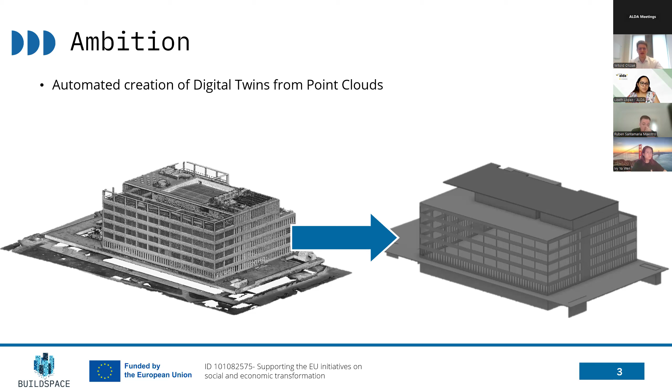Another ambition of ours: as a construction company, our main field of work is managing, monitoring and steering the construction process. So naturally, we also look for chances to automate the monitoring of the construction process. And here, especially, we focused on utilizing regular drone flights for monitoring deviations. So we wanted to collect the data about the deviations with drones and then have it parameterized and saved for viewing in a BIM model.

Once we are finalizing our construction process and handing over the buildings to the investor, it's often that we are asked to do a thermal assessment of the facade to show that everything has been executed according to the design plans. At times you might also need to do an analysis of thermal bridges and thermal anomalies before you even start the construction site. So within Buildspace, we also looked to create reports automatically after conducting a drone inspection.

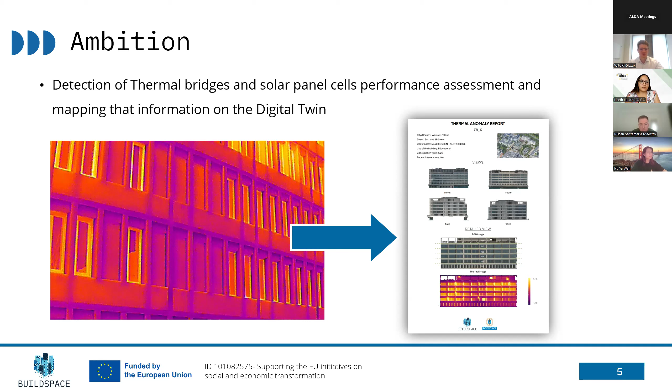In our research and efforts, we also often look for an opportunity to interact with mixed reality interfaces. So within Buildspace, we also wanted to have a chance to browse some of the data collected in the mixed reality interface. As you may have already realized by the images in previous slides, we managed to, in some shape or form, execute all of those ambitions and realize them within our Buildspace services.

For data collection and testing of those services, we used two pilot sites. Not all of you have to be familiar with the geography of Poland. Here you have a simplified map of Poland with Warsaw, the capital, marked, and Poznań, another big city in Poland. We used two of our construction sites: the Rectorate building for Poznań University of Technology, and we are also building a new faculty of psychology for the University of Warsaw. Here I'll quickly go through some more information about those sites.

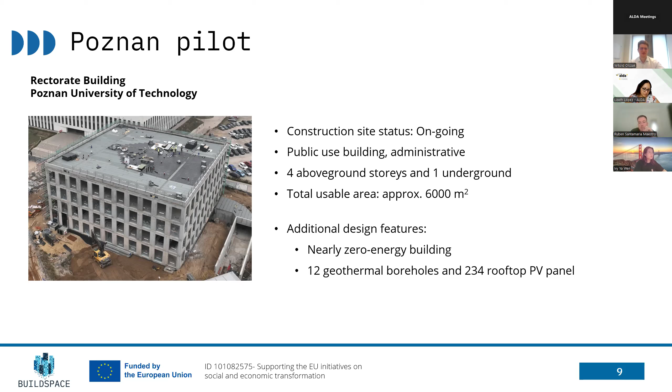Some features worth mentioning are that this building is designed as a nearly zero energy building, and it also has a geothermal installation as well as photovoltaic panels on the rooftop.

The Warsaw pilot is right now undergoing the final handovers. This construction site started way earlier than the Poznań one. That's why we couldn't use it for all of our use cases within the Buildspace project.

And again, we're building this faculty for University of Warsaw. This one won't be strictly an administrative, but an educational building. So the students will hopefully soon be visiting this faculty every day. And this building is of much bigger scale. It has

approximately 21,000 square meters of usable floor area, and it also has a strong focus on sustainability, achieving BREEAM certification. It also has photovoltaic panels on the rooftop, but you aren't as interested in the building and its characteristics, but more about the use cases that we used those construction sites for within Buildspace.

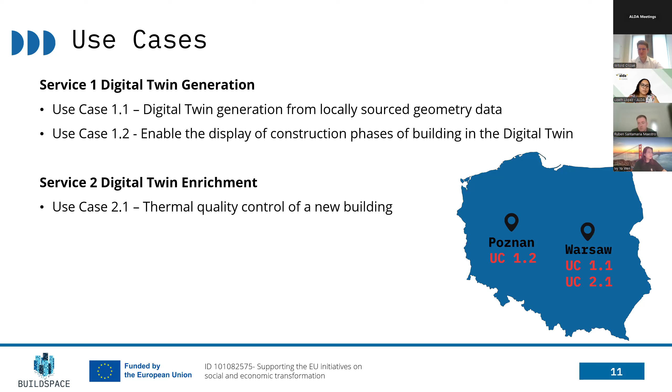In the Poznań pilot, we dove into the delay detection use case. Let me now switch presentations and we'll go through the key concepts of Buildspace. So I'll stop sharing for a second.

And please let me know if you can now see the beginning of the next. Yes, we can. Perfect. Thank you, Lisa. All right. So here, no worries. It won't be just me speaking in a second.

So in the key concepts, it will be me and then Ruben going through the main technologies that we used for our two Polish pilots, and then Ruben together with Ja will dive into the services, and then we'll go to the demo session.

So the key concepts. And before that, I just also wanted for context to mention that we had service 1 and 2 implemented at our two construction sites, but Buildspace goes more broadly in its innovations, and there are also within our project other pilot sites that had city-level innovations. Today we will focus only on the building level ones.

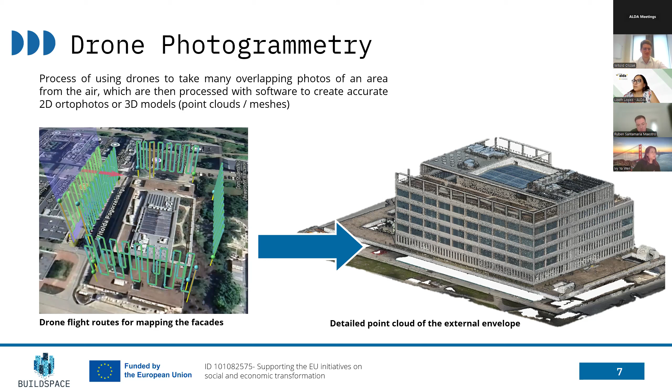Laser scanning. So at the Warsaw site, we scanned the complete building, and for this we used a Leica scanner. This takes much longer than a typical drone flight, but thanks to simultaneous localization and mapping, you not only can immediately view the scanned area, but the stations from which you move the scanner are visible and mapped in the point cloud. So you can, during the process of scanning, control and monitor what you are scanning and what information you managed to already capture.

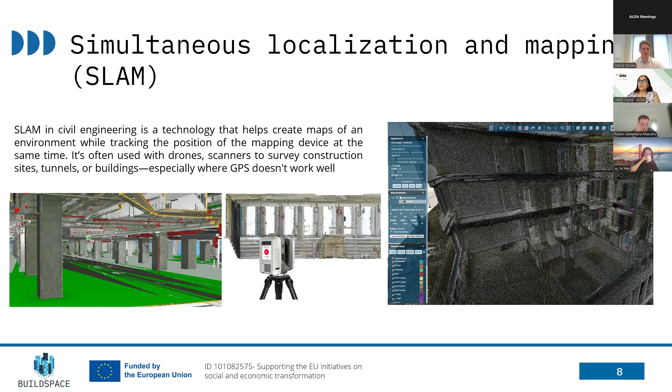And now to mention the scope of exact data collection at our sites. So in Poznań, here again the use case to detect delays, we did 11 drone flights that were spread out. So we did them in 2 or 3 weeks intervals on average.

And we did that to then from each point cloud have particular stages of the construction to monitor the construction process. So here the drone flights had to be perfectly matched to the construction process to not miss any data.

And in Warsaw Pilot, we had 4 total drone flights. I will immediately say that it wasn't necessary to have exactly 4 of those, but maybe to keep some suspense, I'll later in today's event explain why we had to do 3 total thermal missions. And as I mentioned, we also did an internal scan of the complete building.

This was a major effort spread through, I believe, 2 months of work, and we created almost 1,800 individual scans, which were then connected and processed, and this way we produced almost 300 gigabytes of point cloud data.

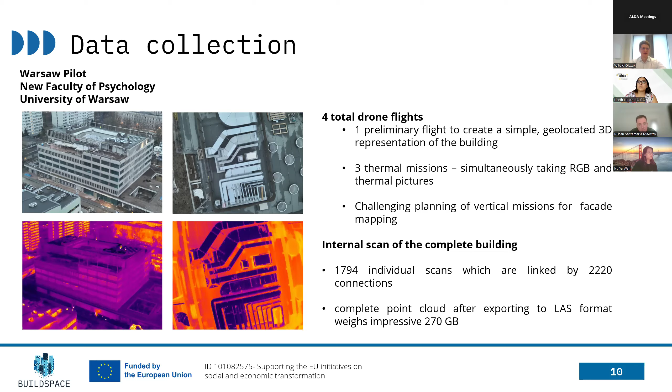Now I'll give floor to Ruben to go on with the key concepts related to building inspection. Thanks, Wito. So basically, I will be diving through the key concepts from the Service 2 side, which has been tested on the Warsaw pilot. So starting with the concept of the thermal envelope. Well, this will be a concept that we'll be referring to frequently throughout all these sessions.

And the thermal envelope includes all the elements that separate the interior environment of the building from the outside, let's say walls, windows, floors, and so on. So its main function is to regulate heat flow, helping to keep the building warm in winter and cool in summer. So in that sense, a well-designed envelope is essential for energy efficiency and, of course, indoor comfort of the inhabitants. Then, if you can move, Wito.

Moving on to thermal anomalies, these are areas of the envelope that behave differently in terms of heat transfer of the building. So a common example would be a thermal bridge, which is a place where heat escapes more easily than it should. And this typically happens at corners, structural junctions, or weak insulation points. Could you please come back just for a second? Okay, in that sense, these issues not only reduce comfort, but also they increase energy loss in both summer and winter.

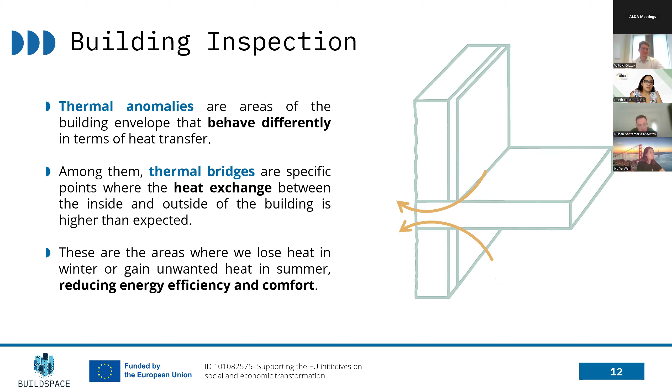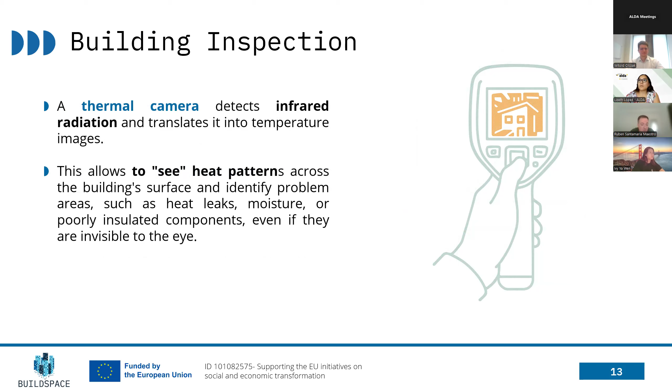To detect these anomalies, we use thermal cameras, which are devices that convert infrared radiation into temperature images, which allow us to visualize heat patterns on a building surface. That way, we can identify issues like heat leaks, moisture, or poor insulation, even if they are invisible to the naked eye, which is most likely the case.

Traditionally, this inspection is done with handheld cameras, requiring a technician to walk around the building and manually capture images, which has several limitations, ranging from lacking access to harder to reach areas to relying heavily on the operator's experience. So on top of that, the images are not integrated into any 3D model, making the process slow and subjective.

So while drones improve access and coverage, they still don't solve the core problem, which is that images are still isolated. So they are not geometrically aligned, and the facade analysis often still relies on handheld inspection. So we are still lacking a truly integrated view of the building's envelope.

To solve this, the RGB images are processed using photogrammetry techniques, as Wito was saying, mostly relying on structure from motion and multi-view stereo techniques to generate a dense 3D point cloud. And then, thanks to the algorithms developed within the Buildspace project, we are able to include thermal data from these thermal images into each point of the cloud.

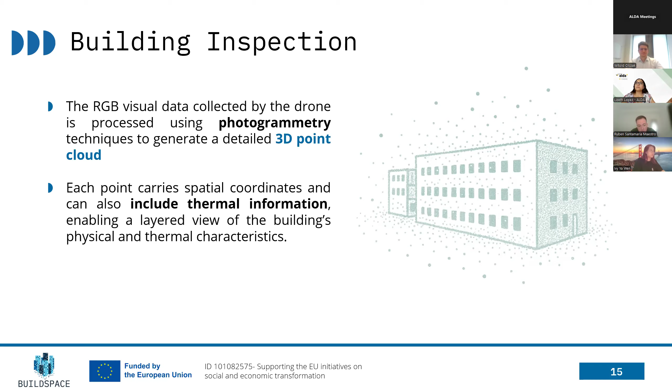So the point will not only contain geometric data, but it will also contain thermal insights of the building's envelope, resulting in a layered and detailed digital model of the building's characteristics, both visually and thermally. So I think that covers the key concepts we will be needing. And now I'm letting you, I think, yeah, you got the one.

Thank you, Ruben. Thank you, Wito. Welcome. I'm now sharing my screen.

Can you see the screen? Yes, we can. Okay.

I'm Yao. I'm very happy to be here and to share from the service provider side. I will introduce service one, which has two pilots. And in service two, Ruben will introduce later.

In each service, we have three points of introduction: first is objectives, input data and processing, and the methodology, and the platform functionalities. Then I will talk about the service one and service two synergies.

Here's an overview of what we are doing. From the data capture part, we have the drone and laser scanner. Vito and Ruben have introduced much on this, and the processing. We mainly process the 3D point cloud model, and then we have the results for service one: the IFC generation part, and also the construction progress monitoring part. Here is the Warsaw pilot, and here is the Poznan pilot.

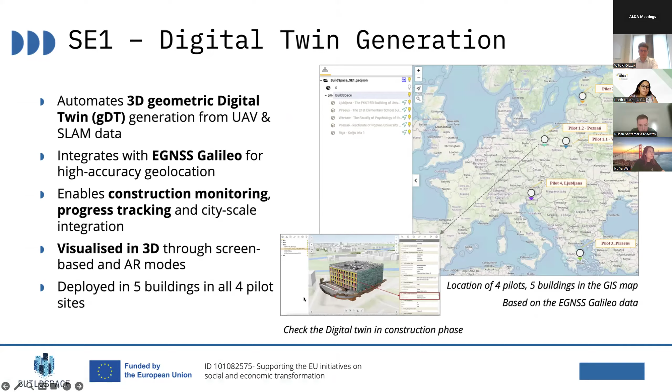So I will go for the first part, the digital twin generation part. From the objectives, we are going to do geometric information, which is the geometric digital twin. The key part will be extracting the key geometric information from the unstructured point cloud.

So our input data will be the 3D point cloud data, E57 or LAS format. In the processing part, we segment our point cloud data into wall, windows, door openings, and roof. We extract the boundary of this for users to measure and also see what semantic information is linked with the digital twin, and to retrieve the spatial relationship information among different elements.

So here is the input and processing, here are the two pilots. For these pilots, as I said, we have the data. We need to do the data generation, data clean segmentation, geometric extraction, and IFC generation.

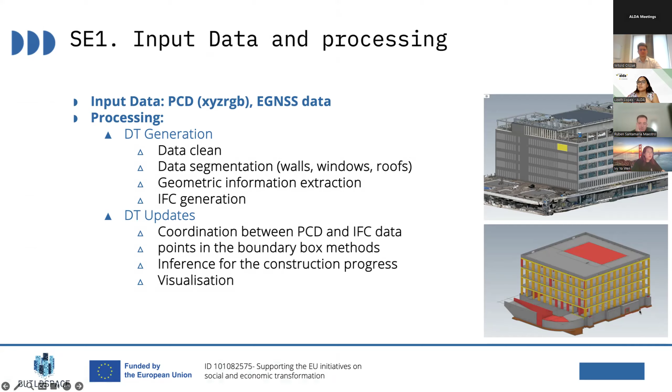Digging into the first generation part, here we have the detailed methodology. The first step we are doing is we need to clean the data, because the model we have has many noise, but we only want the primary building elements like walls, roofs, and openings.

After we get the cleaned point cloud data, we use a machine learning algorithm. Here we use PointNet++, and we also tried another algorithm that did not work that well. PointNet++ works okay for this case. Plus some manual adjustment, we have the segmented point cloud data, separated into categories: roof, wall, and window.

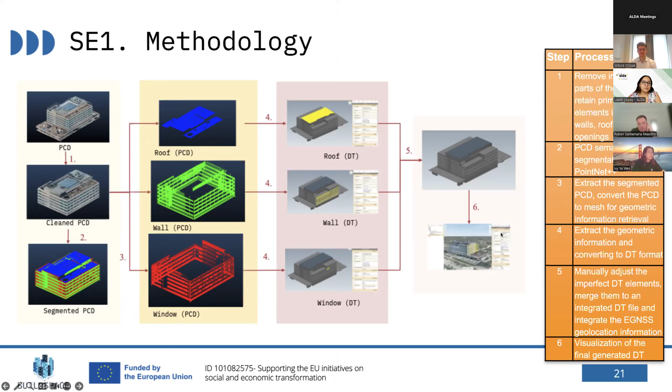We have several functionalities, and in the later demo phase I will show these functions as well. Here you can see the segmented building elements, and I mark up the different categories of points into different colors. We can use the section box to see what's inside the building, do measurements, and visualize element properties when you click on the IFC elements. We can also set the transparency of different elements, whether it's the IFC model or the point cloud model.

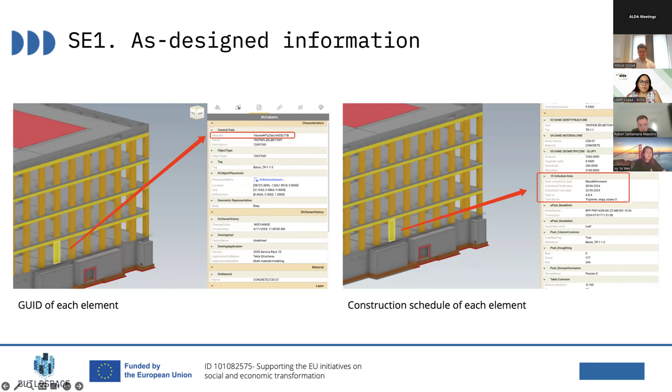Let's move on to the second pilot, at Poznan University of Technology. Here we have this building already introduced by Vito, and in this case we mainly detect structure elements. What we also have to prepare is the as-designed IFC model. Each element needs a proper GUID, the global ID, to trace the information of each element. For preparation, we also need the schedule data, which shows the schedule finish date and schedule start date, for us to retrieve the information. So our core methodology is to compare each scan with the as-designed model.

Then we update according to whether there are zero points, few points, or thousands of points in a box. So we can infer if an object is constructed or not, and then compare to the scan date, which is the date this point cloud data belongs to. We update the status, highlight the delayed elements, and put the attributes into the IFC model, so that the IFC model can be updated.

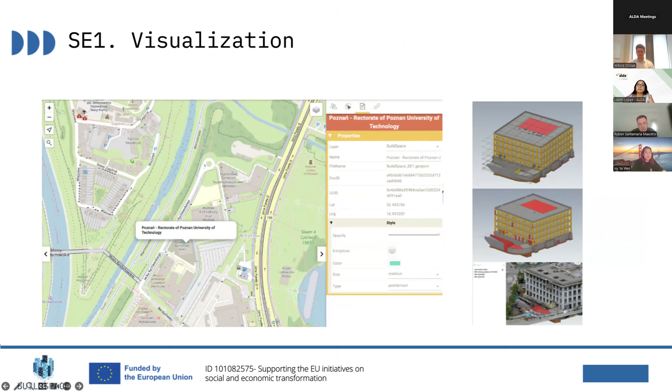For the visualization part, we have the Poznan location, and we also have different models linked to this GIS location: the as-designed BIM model, the updated BIM model, the federated model coordinated with each point cloud data, and also the updated IFC model. We also put it on the construction site and used the AR tool to test if it works well. The results show the attributes on site coordinate with the actual construction site, and we will also cover this part in the later demo.

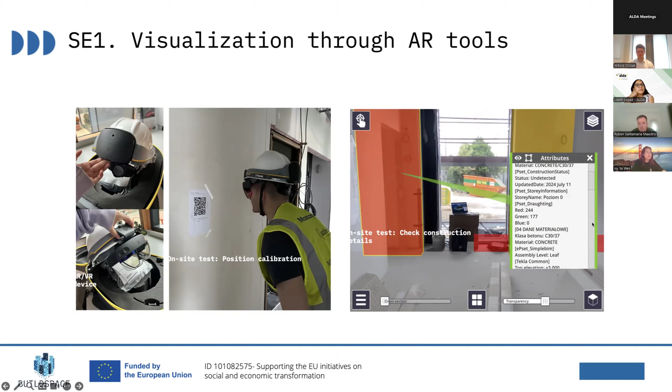Okay, so Ruben, that's all for me. Ruben will talk about service two.

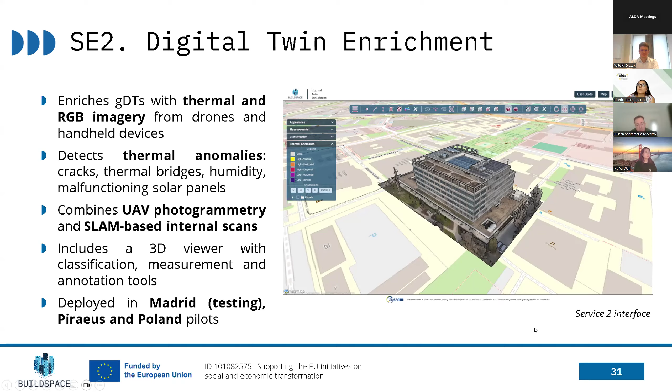Regarding the input data and processing, we first start with three main sources of input data: the RGB and thermal images captured by drones equipped with dual cameras, indoor point clouds obtained with SLAM-based mobile mapping systems, and GNSS control points for accurate georeferencing of the 3D model generated.

Once this input is collected, the processing stage begins, which involves three key steps: joint calibration of the RGB and thermal cameras to ensure both types are perfectly aligned, data fusion techniques used to generate the combined RGB and thermal 3D point cloud, and finally AI-based analysis for automatic detection of thermal anomalies present in the envelope of the building.

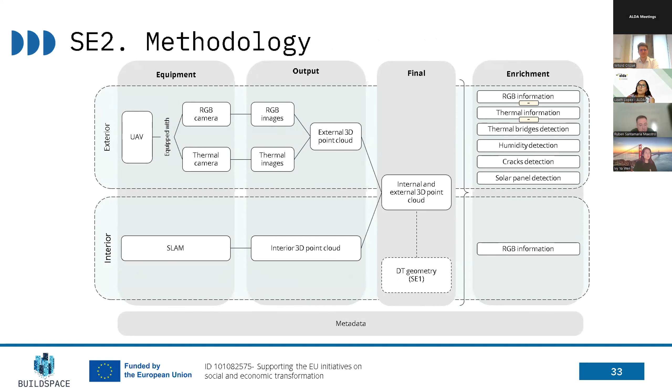Now we'll walk through the methodology used in this service, as shown in the diagram, which is a multi-source, multi-layer process that ensures the digital twin is not only rich in geometric detail but also rich in semantics and thermal insights. Here we can see the equipment used to carry out the data capture phase.

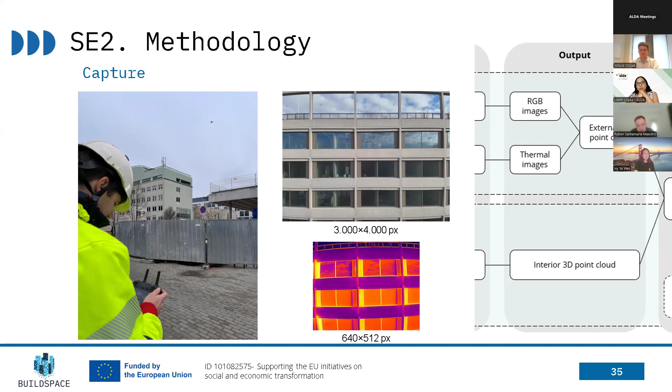This collaboration ensures the quality and consistency of the data. As a result, we developed a step-by-step data capture guide, which helps us standardize the procedure and improve the reliability of the collected images.

Once all the data has been calibrated, we are able to generate a dense 3D point cloud from the RGB images that accurately represents the geometry and textures of the building's exterior. To achieve this, we follow a standard photogrammetric approach with SFM and MVS techniques. The model captures fine details and realistic textures of the whole building's envelope, including windows, roof elements, and surrounding areas, serving as the geometrical and visual foundation of the digital twin, onto which we add layers such as thermal and semantic information.

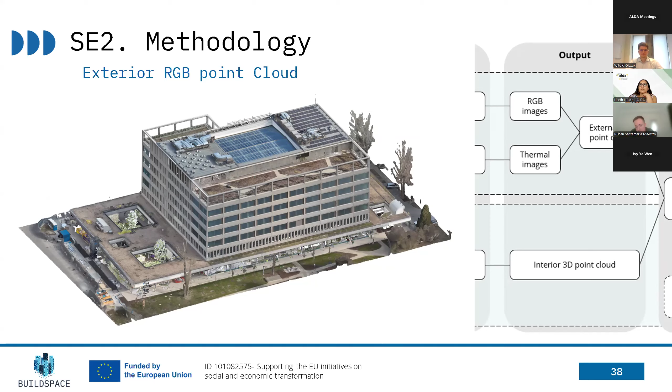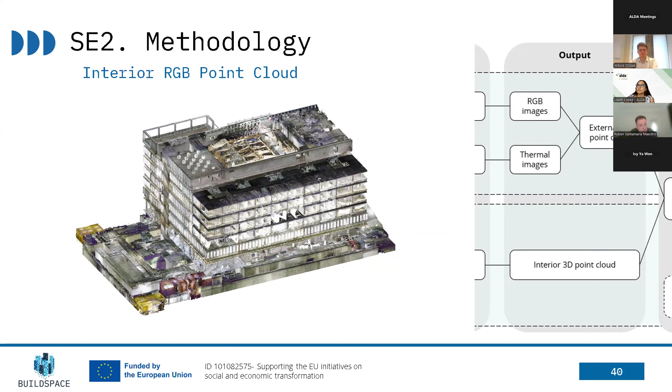By combining this thermal point cloud with the RGB model, we create a fully enriched 3D representation of the building, one of our main goals. We then get the interior RGB point cloud to complete the digital twin, obtained from the SLAM techniques. Finally, we achieve the final point cloud, which combines all the data captured throughout the workflow: the RGB exterior, the RGB interior, and the thermal envelope of the building, all into a single unified 3D model.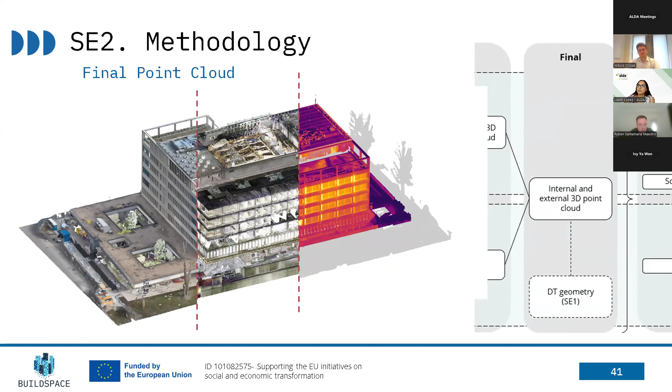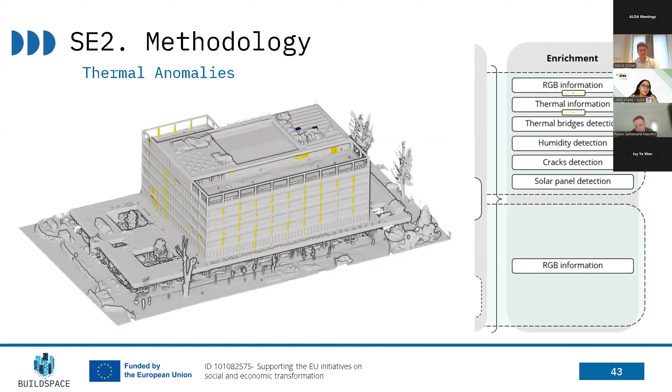Then we conduct a classification phase, which allows us to provide semantic labels to the different surfaces and elements within the building, which are the foundation for the thermal anomalies detection phase, which is based on statistical algorithms that analyze temperature variations across the different building's envelope elements, allowing us to visually and spatially identify the thermal anomalies present in the building's envelope. This would be a close-up view, focusing on the solar panels and the malfunction detected, as well as some regarding the facade.

Then, to conclude with the methodology, all these anomalies detected are included into an automated report that is generated based on this detection. So it provides a structured summary of the detected issues, and it is designed to support building diagnostics and decision making.

In that sense, as shown in this slide, each report includes a global view of the building, then a detailed view, either in RGB, in thermal, and in the detection layer, and also a summary table that focuses on each of the parts of each facade. And then it lists each anomaly with different concepts like mean temperature, anomaly temperature, and the estimated deviation from the mean temperature.

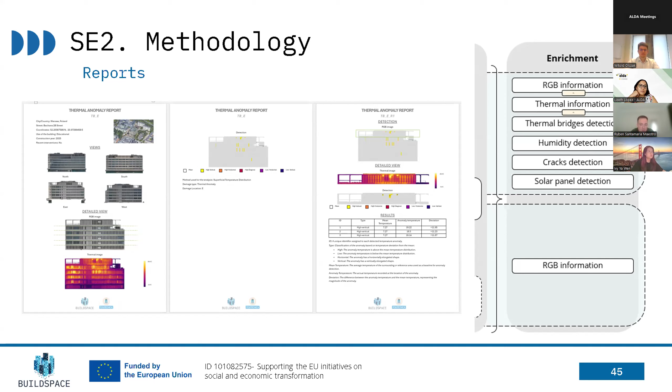So this would be the research that has been conducted that shows how it is technically possible to create a thermal 3D model of the buildings using drone flights, as we were saying at the beginning of this session, and more importantly, that we can detect and classify the thermal anomalies directly on this model. Well, in terms of visualization, additionally to the service development, a 2D and 3D geoportal was developed from scratch to support the full interaction with the Service 2 results.

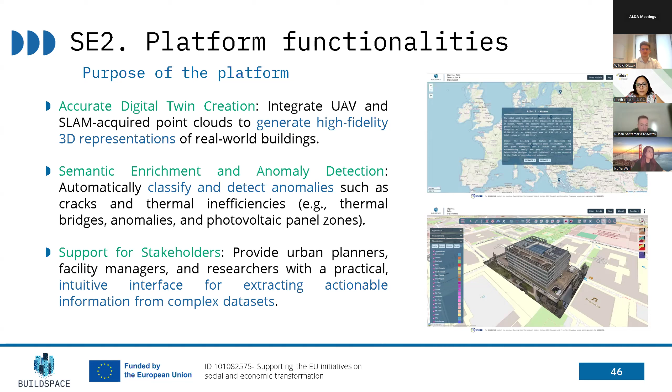And in that sense, to wrap up, we take a step back and look onto the core service objectives. We can see that the platform has been built around these core objectives, and ultimately it supports stakeholders in making informed decisions. So in this way, it bridges the gap between raw sensor data and decision making, offering a user-friendly interface that translates technical data into actionable insights.

So regarding these key features, we have two main views. The first one would be the one on the top, which is the pilot map navigation. And it allows the users to explore the pilot buildings all across Europe that have been tested either in the Service 1 or in the Service 2 pilots. And it also includes brief insights on the building's characteristics and a shortcut to either the Service 1 or Service 2 links.

Then on the bottom part, we have the 3D viewer interface, which allows the user to explore either the RGB, the thermal, or the semantic 3D point cloud, and toggle between them using different analysis tools, and also being able to turn on and off the different classification layers so as to focus the view. And also the different tools that are placed on the top toolbar range from measurement and inspection tools to gaining access to these automated reports we were mentioning previously.

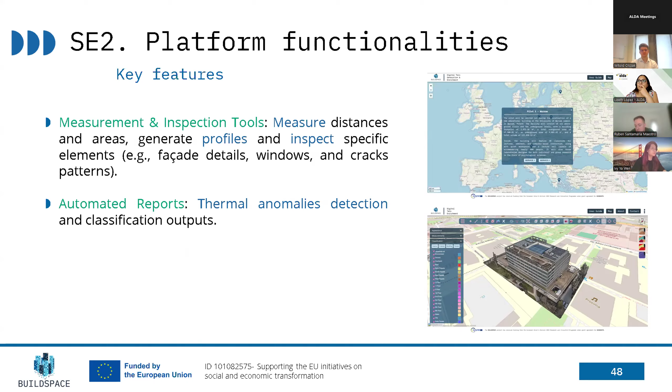So I think you can now regain control, yeah? Yes. Sharing my PowerPoint. Can you see the screen now?

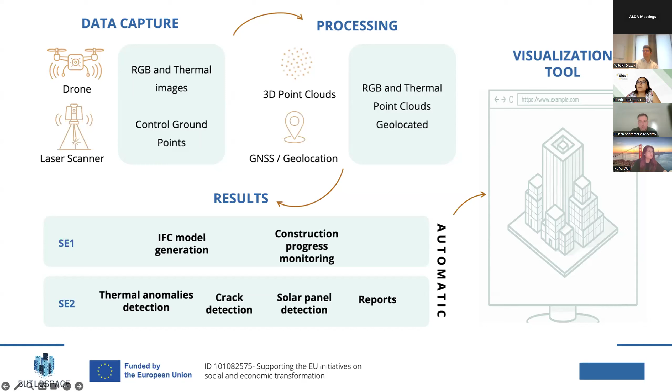Okay. Yes. So after introducing our services, I just bring this slide out again, just to emphasize that our services cover processing the point cloud data, the images, and also we have the IFC data and the construction progress monitoring, and also thermal information, so many users can explore based on our outcomes, and it benefits a lot of people. For example, for the synergies and usability of Service 1 and Service 2, we have the seamless transition from the point cloud data into the IFC data.

And the IFC data is widely used by many functions and by many users, and more information can continuously be put in it. And we have our platform, which provides opportunities for further users, and we have the demos that show how we use this information exactly.

And from the thermal perspective, and also from the visualization perspective, the facility managers can actually see the information that cannot be seen with the eyes, but we have the technology to visualize it and to further plan their works. And then we have the life cycle value, because we capture our existing data, and also we visualize the digital twin and point cloud and thermal in one go.

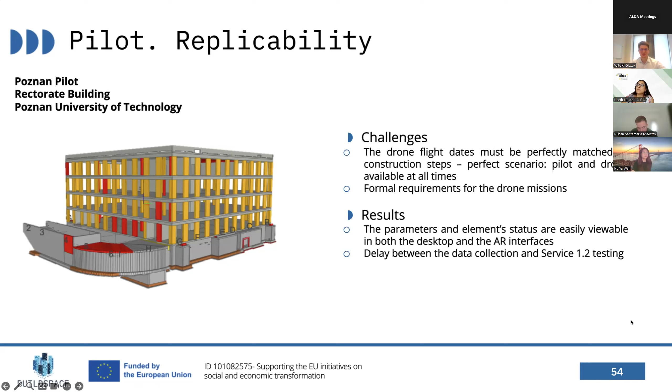So we can move on to the challenges at the Poznan pilot. And I think now I can let you in on the secret why we had 3 thermal missions that were spread out over a period longer than a year. You need very, very specific weather conditions to carry out the drone inspection. So we discussed this on many calls with the UPM team. It was a challenge.

We were getting frustrated at certain points because you would think that Poland has very cold weather, but it was very hard, in the winter season, to find a day of weather where you would check all the conditions. For the thermal drone flight to work, it has to be a bit cloudy because you cannot have direct sunlight. You also can't do it during the night because you need the visible light, so RGB pictures, to be taken and to collect that information as well.

There has to be a difference between the temperatures on the outside, so the weather temperature, and the inside of the building. You also don't heat the construction site at all times. You don't have a perfect 20 degrees temperature in a construction site. So we did 2 flights where we also took too many pictures, and they were very hard to process, and the weather conditions were simply not good enough. So the 3rd time was the charm in this case, and we managed to do that.

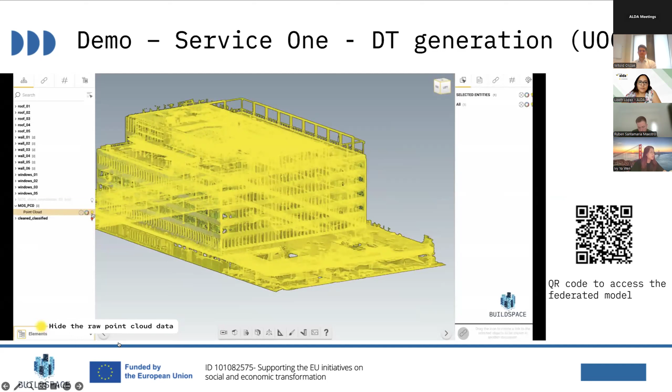Here you will see the visualization of the federated model, with the point cloud data and the digital twin. If you click the points, you can see the raw point cloud data, and you can click here to hide it, and then you will find the segmented elements of this point cloud data: the walls, windows, and roofs.

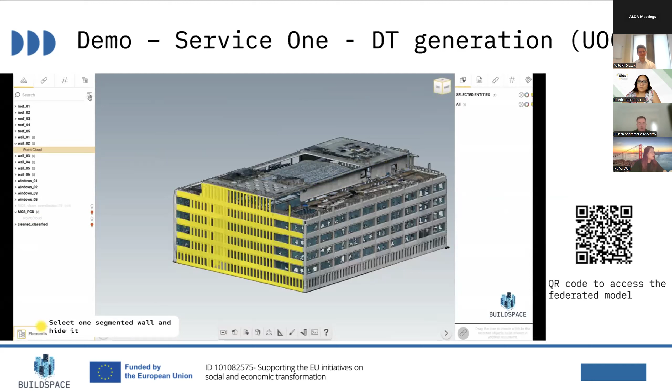And then, for example, here, if you click one element and go to this button, it can directly link you to the list here, and then you can set the visibility of this element. After you hide this part, you will see the windows of it. And here it is showing the segmented, classified point cloud data with different colors. If we hide it again, it will show the single windows.

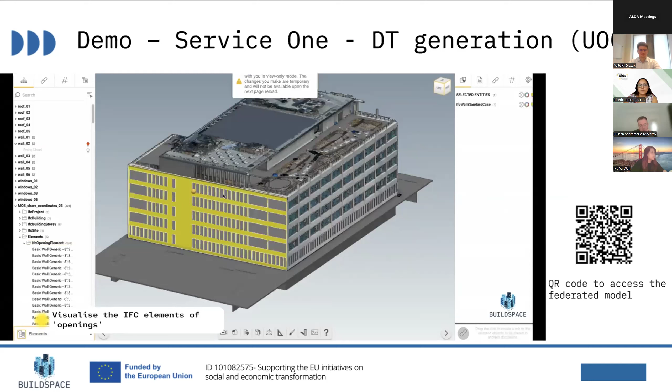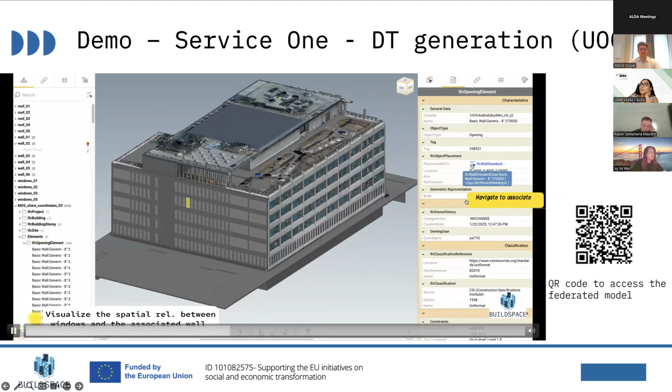And if we go to the IFC model, to visualize the IFC model, we can select the single walls. And we can also visualize our opening elements, which are the windows. If we hide this wall, here we can visualize the relationship between the openings and the wall. If you check the properties of the window, you will see the elements, the associated wall here, and it will link you to highlight the wall.

If you go here and hide this wall, then you can see the overlap, the coordination between the point cloud model and the digital twin elements. We can select the visibility of single elements. You can also set the transparency here.

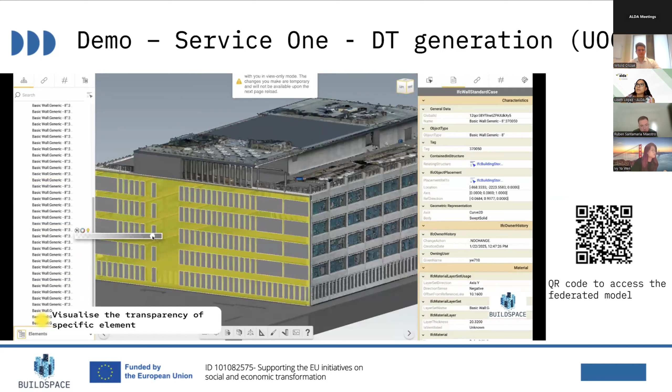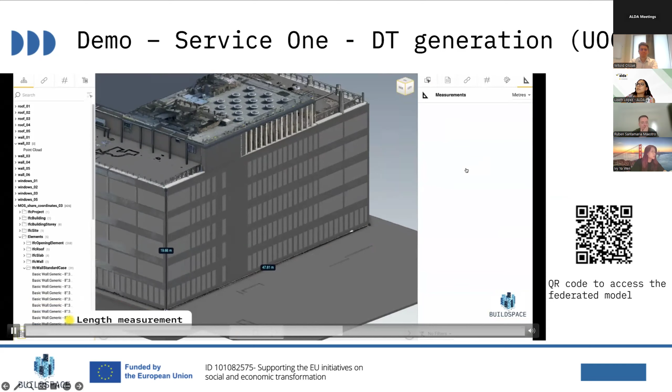And with this digital twin model, we can extract data from the point cloud. So we can take a measurement, for example, the width of the building and also the height of the building. And also if we click here, we can measure the area of it.

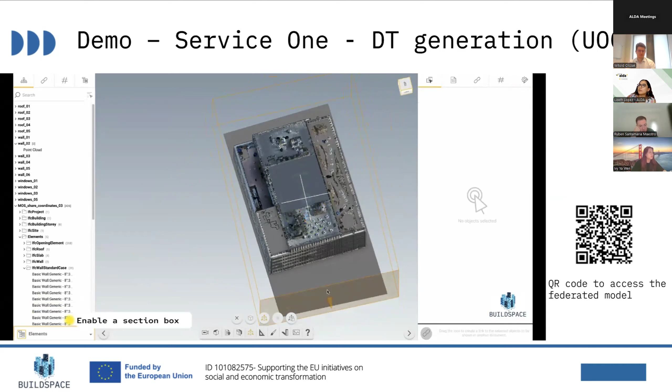We can also go to the section box. We can see the sections from different directions, and you can also adjust the angle. And you can adjust from the different directions, show it or not.

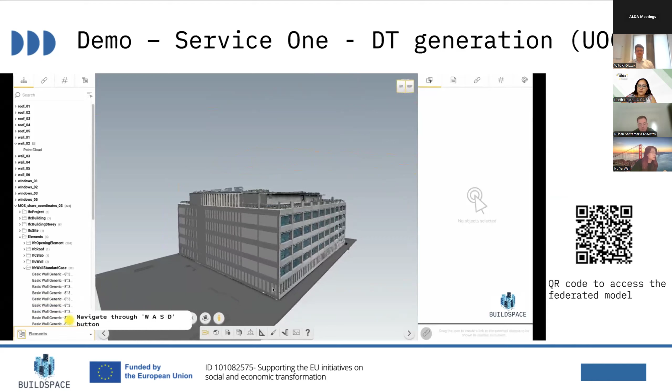Yeah, and we can also go with the game mode. If we go with the first person navigate, we can use WASD on the keyboard to lead you to the outside or inside of the buildings. And in here, you can navigate along the building and also set the visibility if you click when you go around it.

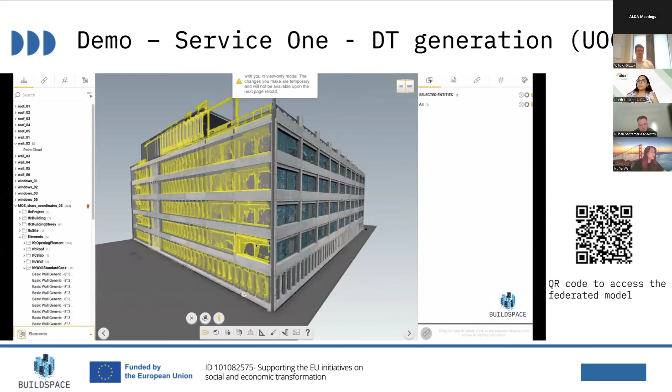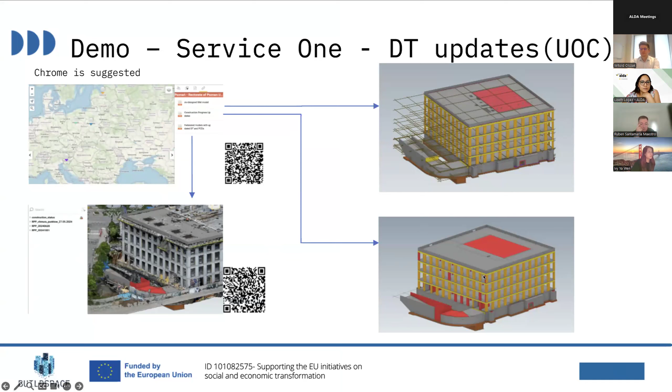Yeah, I think that's all for the generation part. Let's go to the second. So this is the other pillar of service one, which is the digital twin updates in Poznań. Here, I will introduce a four part, but I will enter from this website, which is the GISMap, and in this part, actually, it links to the three models, and this model actually also includes the updated digital twin model. So I will start here.

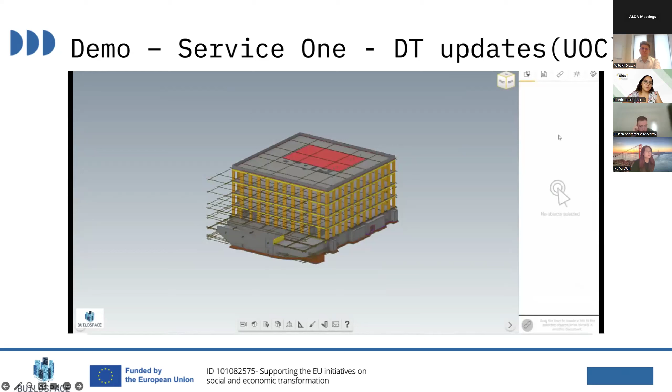From this GISMap link, you can fly to the Poznań location. If we click it and we go to the document button, we will see the geolocation. But if you go to the linked documents link, you will see the three linked documents associated with this page. For here, I will just quickly show what is inside.

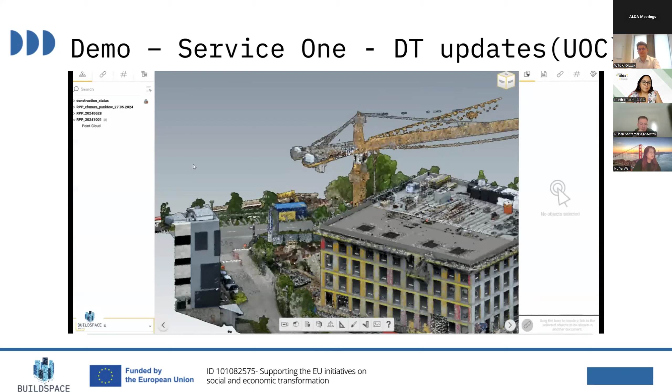And then for the federated model, this is very important for us to investigate if that's correct by combining different scans of the model. So because of the file size, I put the three scans. You can easily set the visibility of different models, different scans. For here, I just show the scans in May. And you will find it easier if you use a section box.

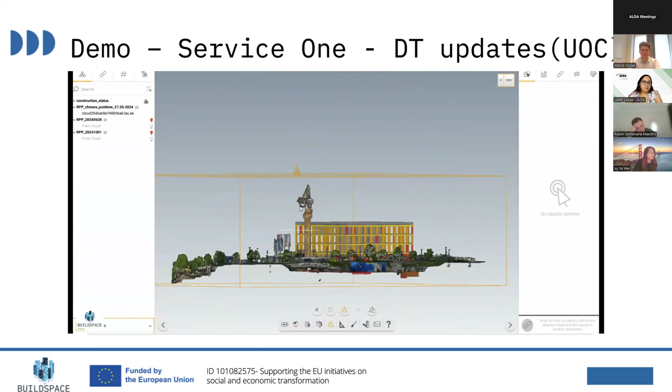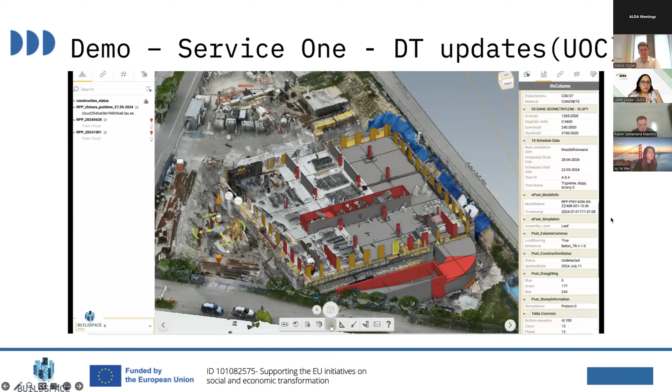To check if it is correct. And you can also see the information associated with each element. So you can find the associated information here, the construction status. And then we go for another element, which is more clear.

If we go ahead from the scans in May to the scan in June, we can see these elements. For example, we go here, we can find the status is red and the scan date is here, right? So it is red and undetected on the June 28 scans, but the schedule finish date is before the scan date. So this is why we mark it in red. And there aren't any constructed elements here.

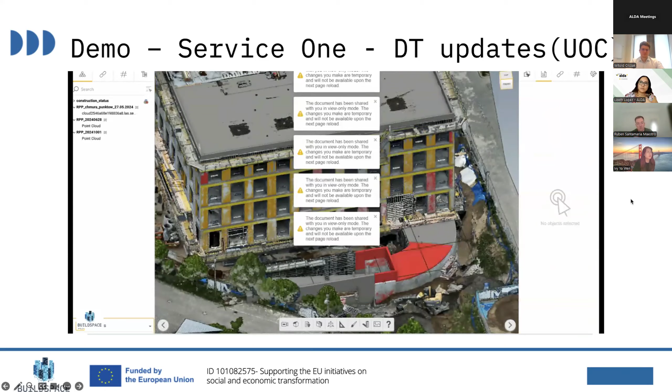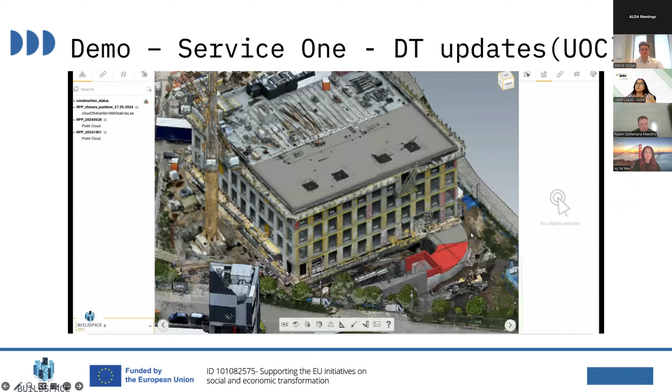Yeah, I think that's all, a simple demo of what we are doing, how we test it in a screen mode visualization method. And Witold will introduce the AR application on site, since Witold already went to the site to do the testing. Thank you, yeah. Yes, so right now I'll cover the augmented reality interface. The same functionalities that Ya has just shown in the browser application.

We also tested the same functionalities in mixed reality, so on the HoloLens device, as well as in augmented reality. This is the terminology of Trimble, because we didn't develop within Buildspace a dedicated application to browse this information, but we're using commercially available applications to see the results of those algorithms.

And we have carried out tests on site. My apologies that we're not doing it live right now, but it would be a huge challenge to do a demonstration on a live construction site, especially with the connectivity and sharing the view from augmented reality interfaces on a webinar. But yeah, we were able to test those functionalities on site a month ago. And we can now move to the video.

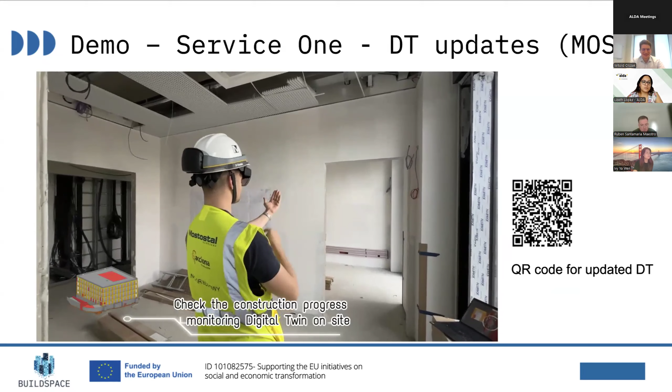We have a video to show what I have personally gone through to test the viewing of the model and delayed elements on site. So first of all, you of course have to load the digital twin, open the relevant model with the visualization of the delays.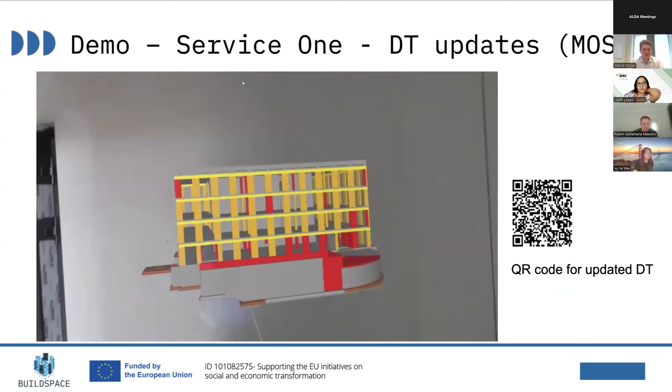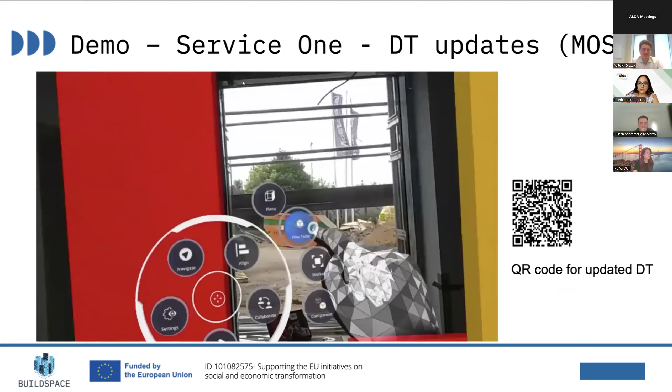Then first you just get the model that is scaled down, but then you have to get awkwardly close to a QR code to move to the visualization in scale 1:1. And then immediately the elements are, with some degree of tolerance, surrounding you. And you can then adjust the transparency, maybe manually try to adjust the location of the elements.

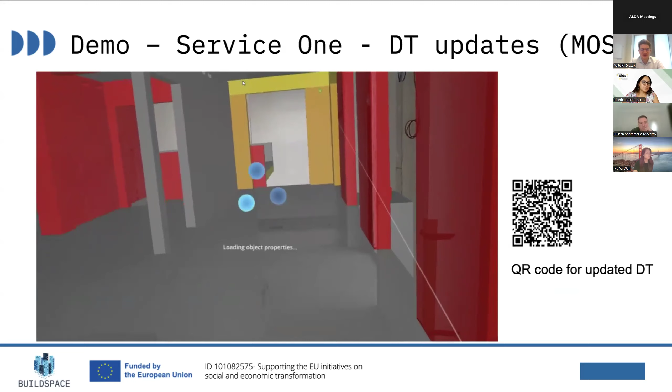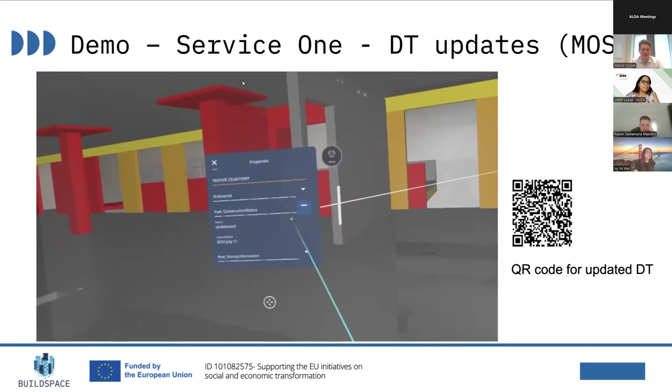Here it's worth mentioning that we were testing a bit later than when the data was collected. So normally the point behind this would be to have those red elements still surrounding you once they're not there in reality. But here we tested after the construction site went on, and the delays were simulated. And you were able to click into the element and check their status, read more information about particular elements.

So it worked great. And the HoloLenses are still, I would say, more on the experimental side, but thanks to also using the commercially available application, it was quite user-friendly, and the information was clear to find. So that's pretty much the summary of the tests on site. Thank you.

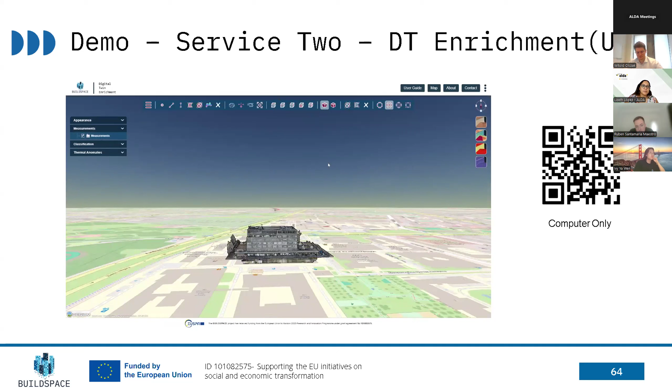Then the next block is about different movement modes: user-based view, object-based view, and helicopter view. Then we may be able to center the view on the whole building. Different predefined views from top to left, right, and so on. And then we have two different projection modes. This one is the perspective one.

And the other one would be the parallel one, which requires disabling the world. So we get to see this warning, just letting us know that it is not able to visualize the Earth in a parallel projection. So we get these two different view modes.

And finally, within the toolbar, we are also able to make sections of the building and see either the inside of the section or the outside of the section. This would be the inside. And in the same way, just swapping our button, we are able to see the outside. So we get to focus on just the part we are willing to see. And maybe if you want to get into the inside, this is the way to watch it.

We are also able to make the section from a polygon instead of a volume. So it's the same functionality, but just defining a custom polygon.

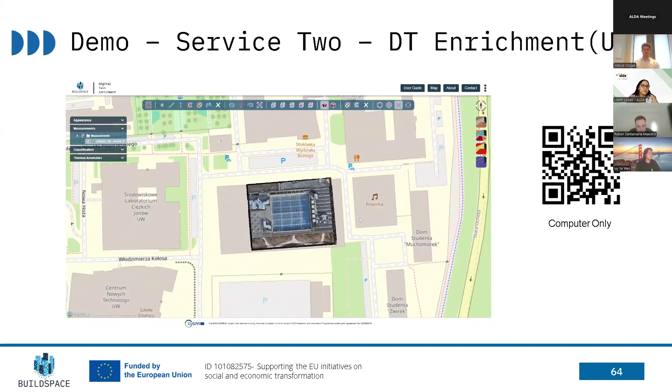Following with the project tree, which is on the left, we are able to first of all customize the appearance of the interface. First of all, it is the point budget, which is the amount of points displayed. Then the field of view of the interface and the movement speed.

Then the user is also able to turn on and off the shading, and also customize the appearance of the shading algorithm for visualization cases. And also the user may be able to turn off the background and choose between different modes.

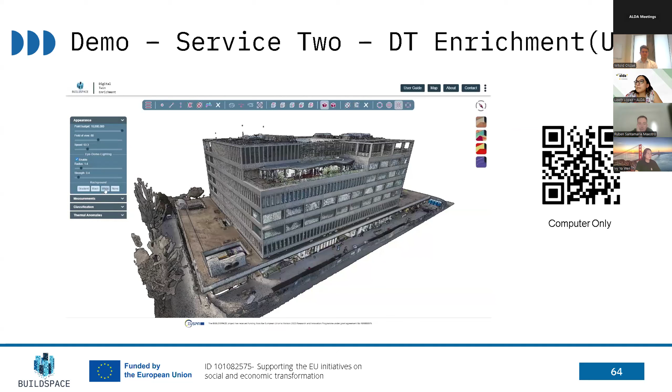Then if we head on to the measurements one, we are able to see all the information regarding this annotation that have already been done, either the spatial placing or the temperature information of the point, the classification, and so on.

Then along the section, we are able to visualize the semantic information within the whole point cloud and turn on and off for visualization purposes the different elements of the point cloud. So there are a few predefined views, and then the user is able to turn on and off at his will the different layers. So here we are just turning off the different floors of the inside.

Finally, there's a drawer regarding the thermal anomalies legend and information that we will dive onto after we review the different visualization modes, which are the RGB one, which is the first one we were watching, then the thermal information layer.

Also regarding the different capture times, as it is quite a big building, and we faced some struggles, the whole envelope has not been captured at the same moment of the day, but along a few hours. So the thermal information may vary in between the different facades.

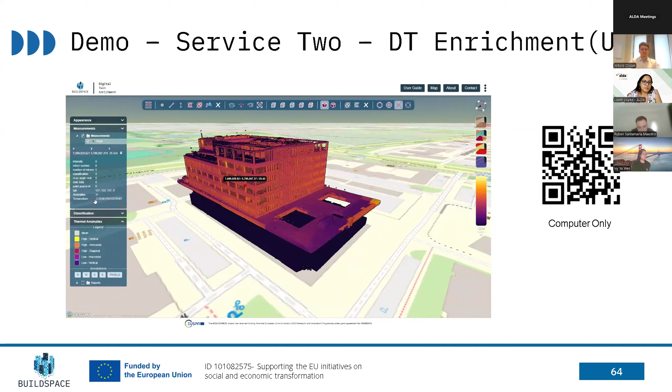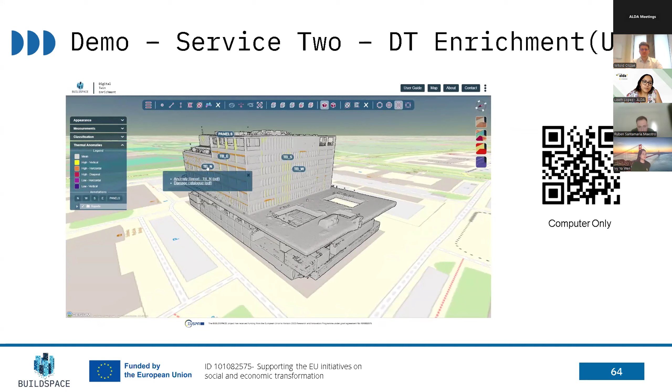And then we also have the semantic classification model we were saying previously, and then the thermal anomalies detection. These anomalies detection are color coded regarding their characteristics as shows the legend, and then also we can get to use the different annotation reports for each of the facades and the solar panels.

So just clicking on each annotation, we may center the view on the corresponding facade. And then if we want to get access to the report, just click on the PDF sign.

So this would be the thermal anomaly report for the south facade. And as we were saying previously in the methodology, we get to see the general view, the detailed view of the building in RGB, in thermal images, and then the anomalies detected with a different color coding.

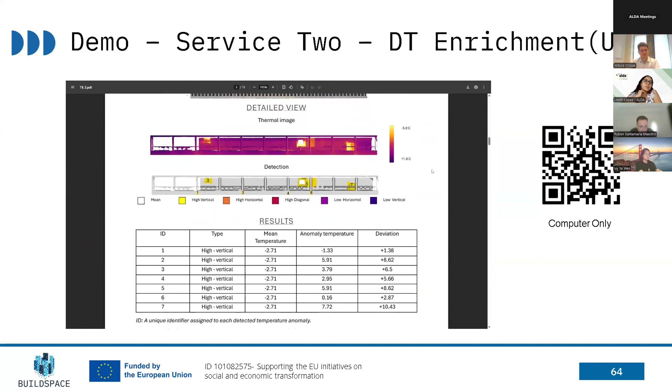Then we get to see each section of the building and the different insights from the thermal anomaly detection, either the mean temperature, the anomaly temperature, and the estimated deviation.

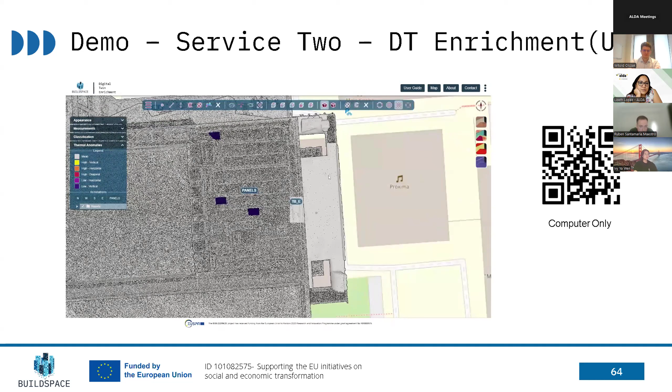So if we get back to the 3D model, we are also able to head onto the solar panels anomaly detection, getting to see the different solar panels that the thermal anomaly phase showed with an anomaly or a malfunctioning issue. And the same way we get to see the thermal anomaly report with the RGB, the thermal, and the detection layer, and as well some insights and brief descriptions on the different concepts.

Additionally, once the thermal anomalies have been detected, the user is also able to get to see a catalog describing the different types of thermal bridges, moistures, and so on. So as to get a brief information about all this.

And if I'm not wrong, we can turn that off, and that be all the overview about the core components of the Service 2 platform.

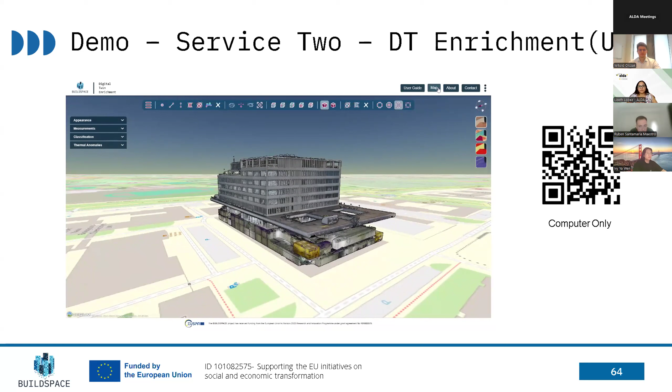And then if we just want to head back onto the landing page, we just need to click on the map, and that we will be back here so as to check another pilot. And that be all. Thank you so much.

So if you want to, I think it's Lizeth, you are the one speaking now. So I'll stop sharing. Perfect.